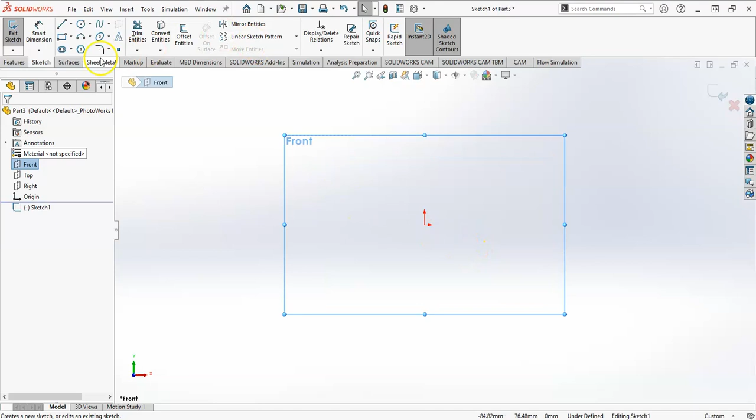So we'll go ahead and enter, and it looks like if I want to orientate it like this, I'm going to sketch on my front plane. So I'm going to just sketch the general shape to start. So that's that outside, and I'm going to start adding the dimensions before I continue. So I'll make that 50 because the outside is 50.

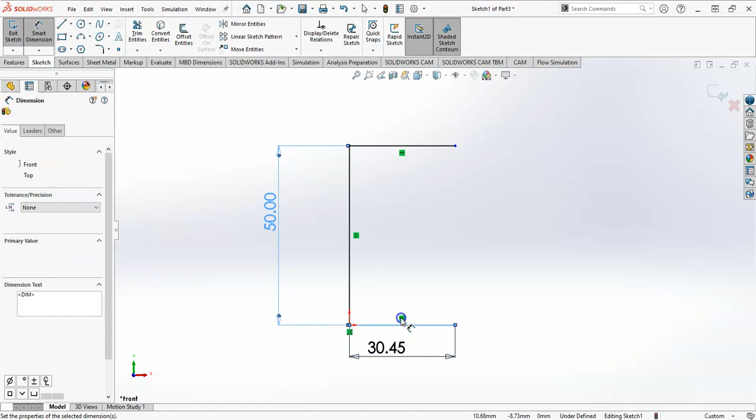So the hole, the distance from here to here is 30 plus. So a full round means that we have a 40 diameter. So the distance from here to here is going to be 20. So I'm going to make this 50 then as well. And then let's look at the top. So our top is then 30. So we'll add those 3 dimensions.

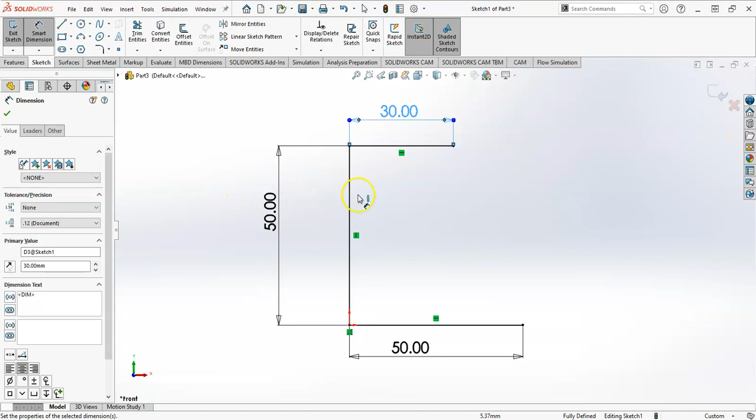And then our thickness looks like it's 10 throughout the whole thing. So it's actually 10 and a 30, because that's 50, but we will dimension it exactly like we're seeing it in the picture. So we'll come down over. So we'll finish our shape. And if we get all of our horizontal and vertical relationships, we're good.

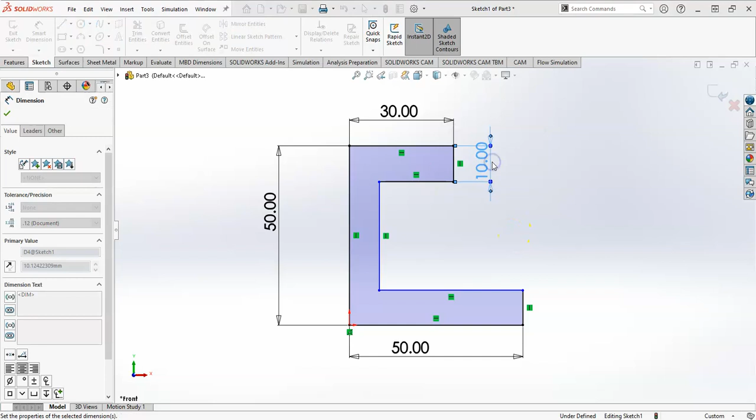You notice that this one doesn't have that horizontal. So we'll come over here and get that. We'll add my 10 and my 30. And then, you'll notice that we're still underdefined, and this line here is blue, so it can change thickness.

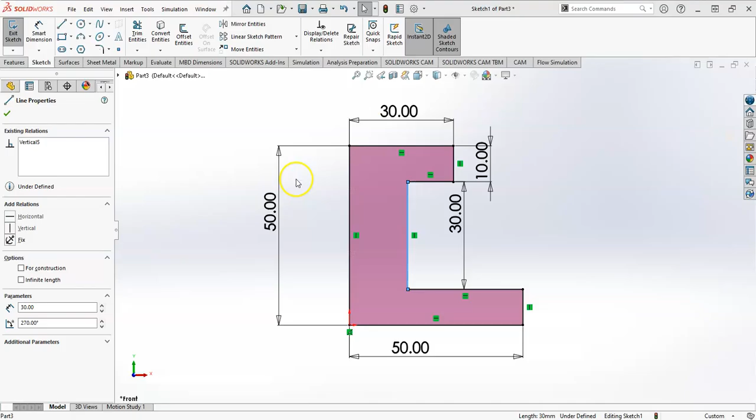So we'll have a quick look. So I don't see a dimension for that, but we can assume that it looks the same. So we'll assume that that is actually 10, and we'll add that 10 in there. Now we're fully defined. So we'll finish that sketch and we'll extrude.

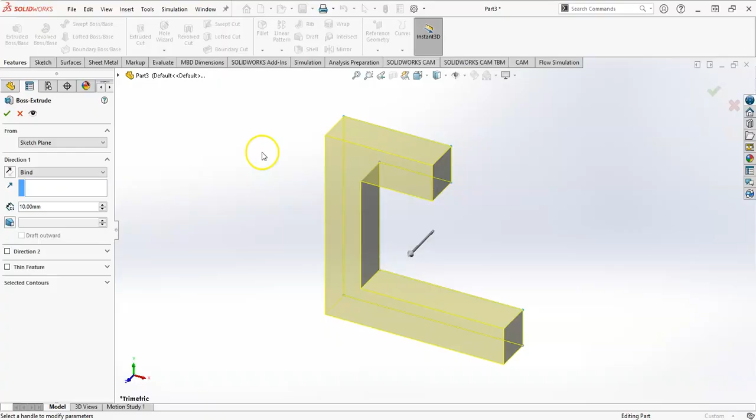And this time I want my plane in the center, so I can put my circle right on that axis. So at 40, I'm going to take a mid-plane and go 40. So by doing that mid-plane, my plane will be right in the middle, and that'll help me out when I draw this circle. So I'm going to sketch on that face so that I can make this circle.

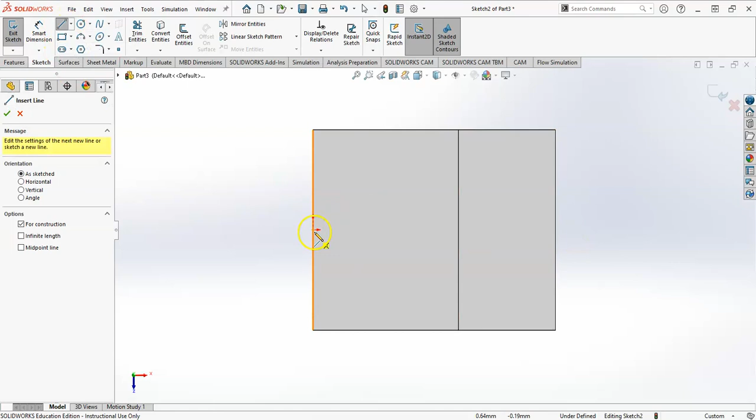We'll go normal to. And now my origin is right in the middle, so I can choose center line instead of a normal line, and that draws a construction line. So from my origin all the way across to that other line, that just allows me now to have my circle right on that line because it's centered.

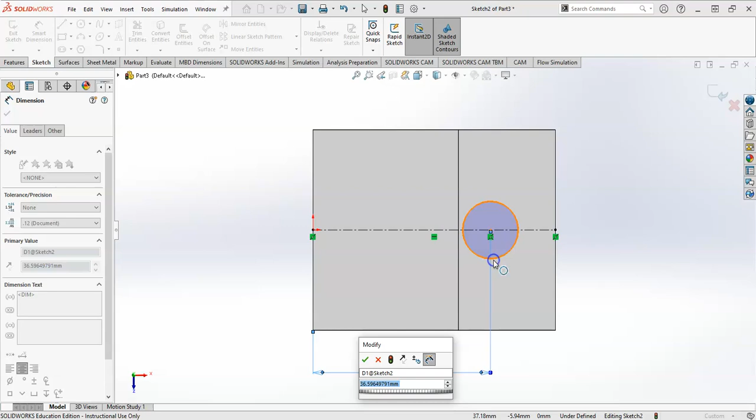So I'm going to add my dimension of 30 in. So that's 30 from the back edge, like so. And you'll notice now that it's under this part, which if we look here, it actually does look like it's under. So we'll go back normal to and finish dimensioning our sketch.

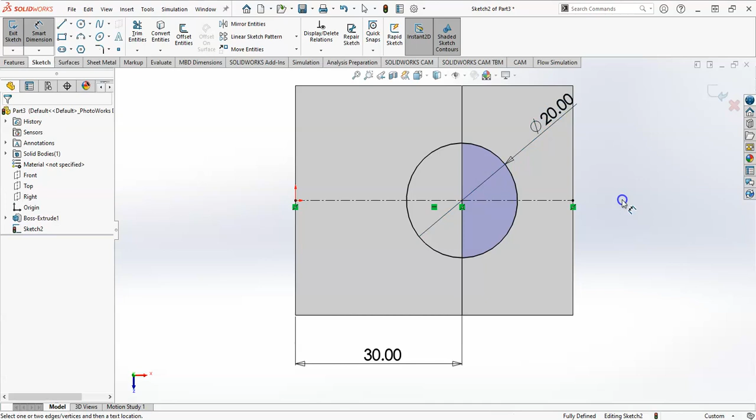So our hole is 20. So just with those 2 dimensions and that construction line, we're able to get this cut. And anytime we're going through the whole thing, instead of choosing blind, I want to choose through all, and I'm going that one way.

So now we'll add the fillets. So these first fillets are 10, so there's 4 of them. So there's 1, 2, 3, 4. So just select each of those edges.

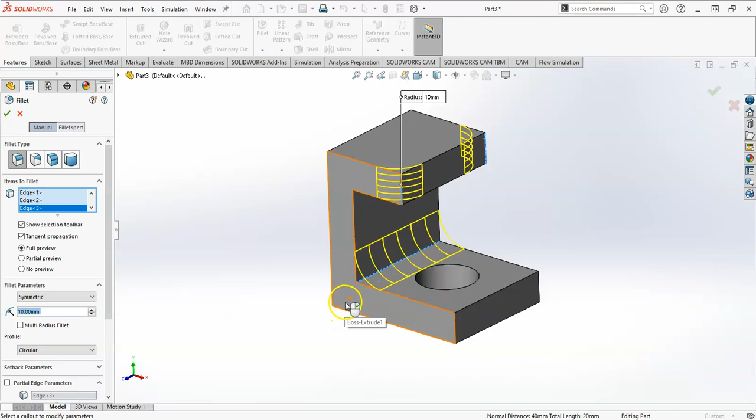So we could fillet with a 20, but there is something called a face fillet as well, which gives us the full round, or we can go with the full round fillet. So in a full round fillet, you need 3 faces.